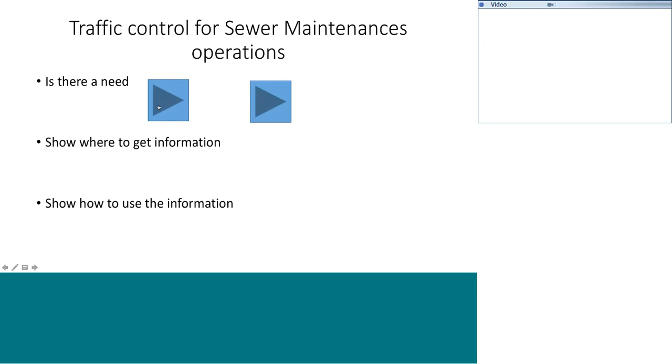Anybody ever heard of the Manual on Uniform Traffic Control Devices? It's huge, isn't it? When you think about that, that manual is the minimum standard. And that's something we have to deal with as we set up work zones and as we work in these roadways. I'll show you the range of that here in just a minute. So that's where you get your information, and then we would show how to put that information into place.

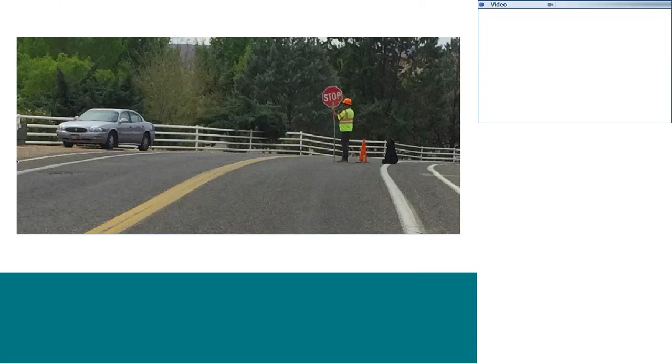Let's get a little closer. Can he have his car that close? Can he have his lunch pail that close? Can he be standing in a traffic lane?

If you look at it, here we are. His vest should be meeting the ANSI 107-2004 or 2010, which is the last edition, vest. That vest was what color? Fluorescent yellow-green, was it not? Anybody know what the state of Utah has identified fluorescent yellow-green for?

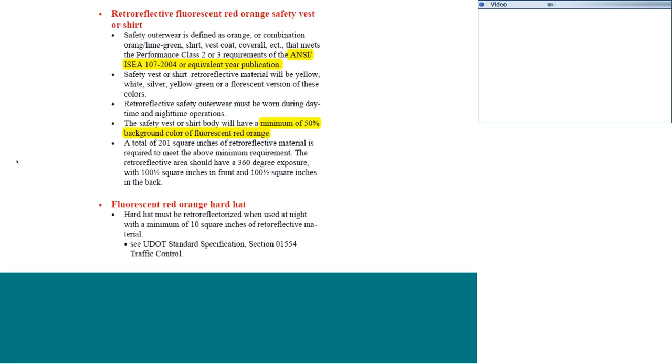What was right behind the flagger? There was a cone there, was there not? 36 inches or so. Did he trip over it? Did he try to get out of there? You bet he could. So those are all things that we could look at,

and we can find areas that we need to upgrade or make better.

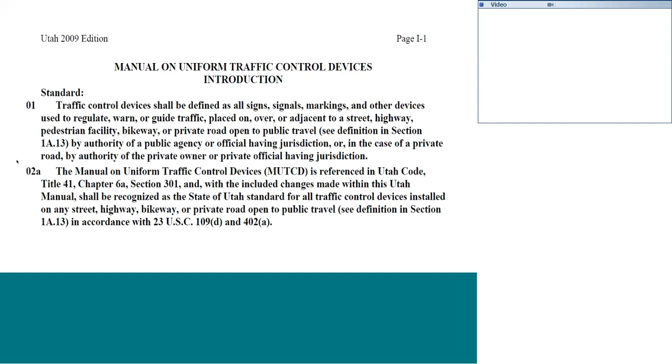Part 2A, or paragraph 2A: the Manual on Uniform Traffic Control Devices, or MUTCD, is referred to in Utah's Code, Title 41, Chapter 6A, Section 301, and with the included changes made within this Utah manual, shall be recognized as the state standard for all traffic control installed on streets, highways, bicycle ways, and private roadways open to the public. Again, it tells us to see that same section.

So here's our section: private roadways open to public travel, private toll roads, and roads, including any adjacent sidewalks that generally run parallel to the road. Why are we talking about sidewalks? Do we have to deal with sidewalks? Do they have a standard? What's the standard for sidewalks?

It's the Americans with Disabilities Act, is it not? So everything we put out there has to have the same ability for those people to move from one area to another, whether they're handicapped or not. So if we put them across the curb and gutter, we need to build a ramp that meets the standard of 8%.

Within shopping centers, airports, sports arenas, and other similar businesses and recreation facilities that are privately owned, but where the public is allowed to travel without access restrictions. Roads within private gated properties, except for gated toll roads, where access is restricted at all times. Parking areas, driving aisles within parking areas, private grade crossings shall not be included in this definition.

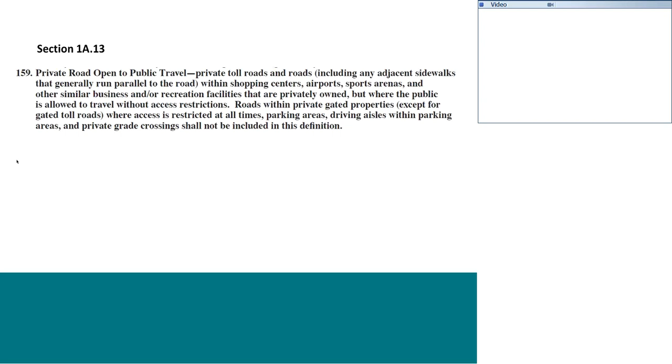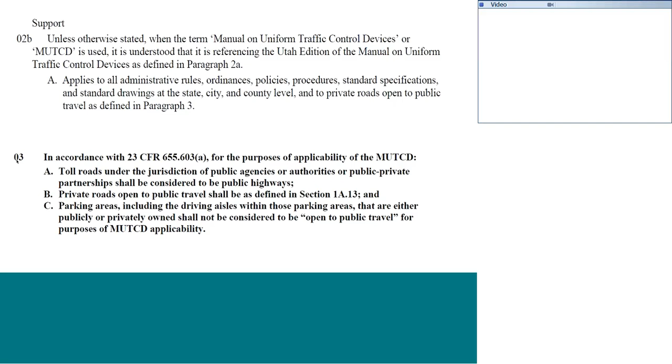Okay. One thing that kind of bothers me because I've gotten older - does everybody know about how when you get older? Some of you guys a little older might recognize that you have a change in your eyesight, do you not?

Every 13 years after you're 21, you need double the light to see the same thing you saw at 21. So when you get to be a young guy like I am, you can realize how many times that's doubled. And this bright light makes it so I don't see a lot of things defined. I get really ticked off at the highway patrolmen because the first thing they do when they stop somebody in the middle of the night is turn their overheads on, and they turn them on high intensity.

What does it say in the MUTCD about lights on arrow boards and work areas? If they have a dimming effect, it should be dimmed to half of what their normal daylight brilliance would be. If they're not, they should be directed away from the flow of traffic at a perpendicular angle, or they should be running parallel to traffic as they are moving away, so it doesn't shine towards the traffic. So those are the things we need to look at if we're working at night.

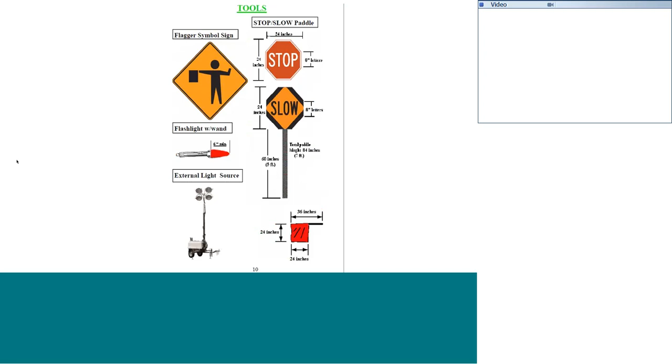And again, Utah's stop slow paddle is of a different standard than the MUTCD. The MUTCD standard is an 18 by 18, and Utah's is a 24 by 24. Okay, other equipment, pencil and pad, driver's information, that kind of stuff.

Talks about the flagger station. We've already talked about that. Talks about the procedure the flagger should go through. It's laid out how that flagger should be doing their job. The stop, hold the paddle in the right hand, put their hand up, and they face traffic.

After the first car stops, they move out to the center line so that the people behind that first car can see them. When they get the message from the other end, check the work zone, move back, turn the paddle to slow and release traffic, slow traffic with the slow sign. So the procedure is all laid out for them.

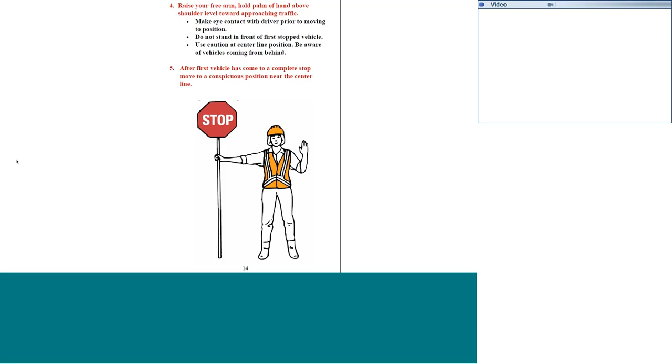Also laid out for the flag. Virtually the same setup. This is something that UDOT's put out there that I really like because it gives you the different types of surface conditions you may have on roadways and the distances for the speeds you may have to adjust for.

And if we start looking at those conditions and a lot of the areas that we flag, that visibility issue becomes a real problem for us with trees, hills, curves, or whatever it may be. So this is a real good one here.

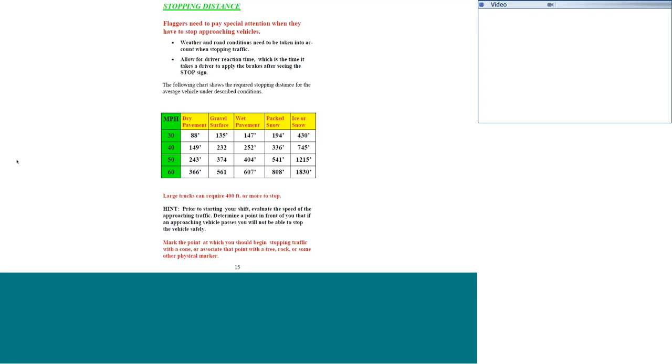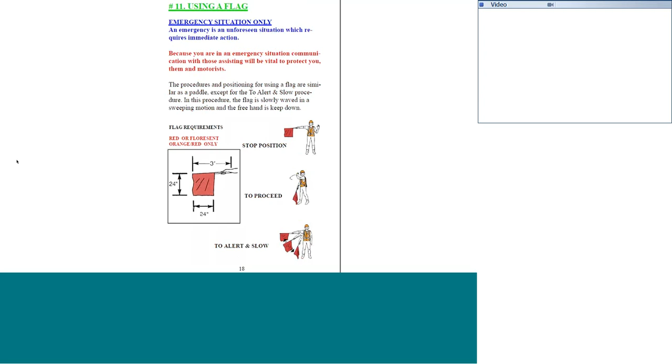This is the release signal, and this is the slow down signal that we've already gone through. Emergency flag: there's the stop position, the release or proceed position, and the alert position by moving the flag up and down. It's not waving the hand. Hand goes to the side, flag goes up and down.

What do we do with pedestrians? People with disabilities and bicyclists. We already talked about the Americans with Disabilities Act and how you have to comply with that.

Emergency vehicles, you should have a procedure for handling those or special circumstances. You have a hay swather come through there and you've got a limited width, and that hay swather is wider than it is. What are you going to do? What's that flagger supposed to tell them? So that all needs to be laid out.

What kind of authority does a flagger have? Has the same authority as a police officer to control traffic. What's the difference between control and direct?

Control is stop, release, and slow. Direct is telling them where to go. Only a law enforcement officer can direct traffic. So a flagger is just controlling traffic, okay? And they have to be in a work zone, and it has to be properly set up for that flagger to have that authority.

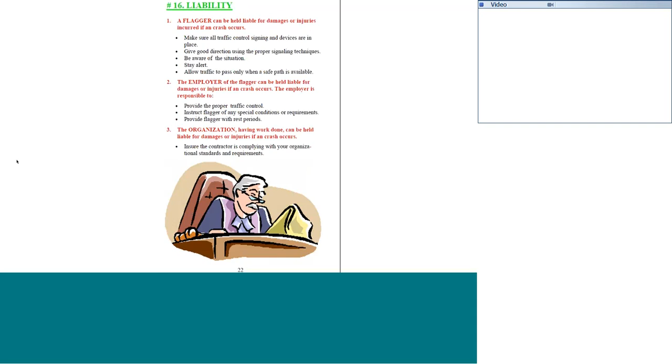Okay, we have a liability with this stuff? You bet we do. We've got a real liability with it. Those are the things we're trying to keep away from with it.

They have a lot of appendix. These appendix talk a lot about the same things. This is in the uniform handbook, this is a page from the Manual on Uniform Traffic Control Devices that they've put right in that handbook. There's another page from it.

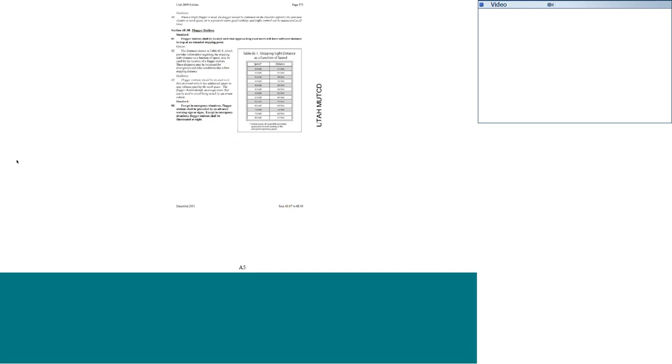Here it goes through and shows you those procedures again for the flagger, with a paddle and with a flag. Talks about the distances here, and it talks about the minimum standards set by the Federal Highway Administration, which is the MUTCD and the Utah adopted one.

And it talks about the traffic control zone and the four parts of that traffic control zone. You have a warning area, a transition area, an activity area which includes the buffer space, the work area, and the actual traffic path.

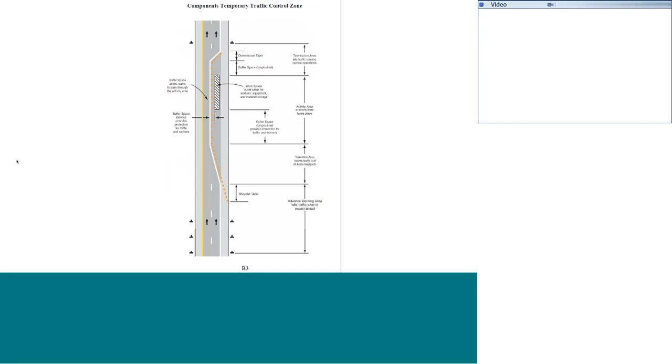And then you have the termination area where you return traffic back to its normal lane that it would be going into. They even go so far as to give you pictures to show you what it should be set up like. And this is one of those pictures here.

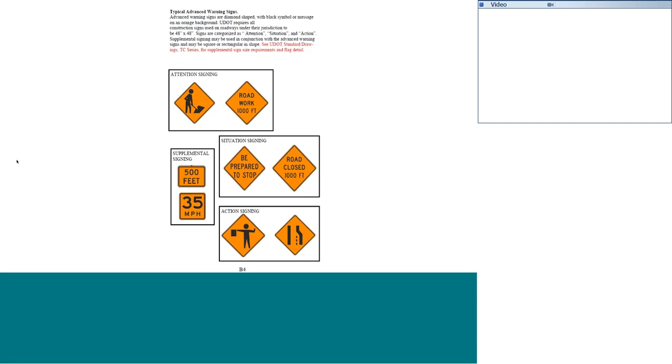This is talking about the signs. What does orange mean? I mean, we've got red out there for stop signs, and we've got yellow out there for caution signs, but what is orange? Orange is a temporary caution sign. It's out there for temporary stuff. If it is permanent, it is yellow. And it may have the same symbol on it, but it's going to be yellow because it is permanent.

There's our heights and our setbacks for them, both for portable and for stationary. Talks here about what we can use and what we can't use with different speeds. They always told me for UDOT you could not use cones. Here it tells you where you can use cones and where you can't use cones.

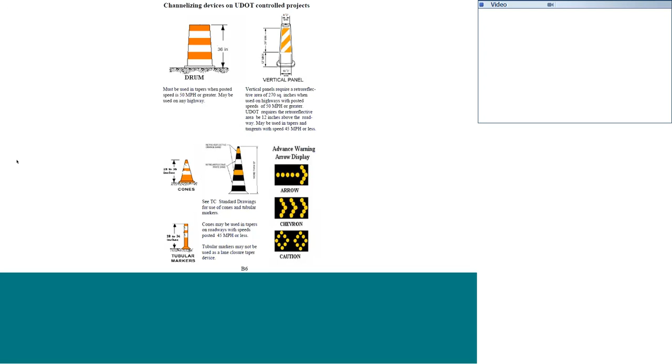Talks about your arrow boards. It tells you what is acceptable there and what isn't acceptable there.

This is a really good chart, and it's the same chart that you have here in these drawings, the TC4A page. And this one goes a little bit further and tells you the flagger's distance and the flagger station. But this is a lot better chart, in my opinion, than what the federal people have put out, because the federal people have put it out there as urban low speed, urban high speed, and rural, and interstate and freeway expressways.

What's the difference between urban and rural? Curb and gutter and sidewalk. What's the difference between urban low speed and urban high speed?

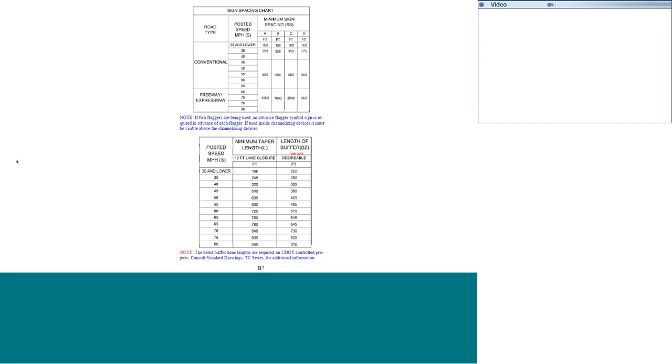Utah defines it as 30 miles an hour. Below is low, above is high. Utah's done a lot better job with it as far as I'm concerned, because they've laid it right out. They've told you what it is and what it isn't.

What do we do on intersections? It's telling you right here, you've got to have a flagger for every leg of the intersection. If it's a signalized intersection, it has to be in a red flash mode. If it's not in a red flash mode, you've got to have a law enforcement officer to direct it.

How many lanes of traffic can a flagger take care of? Two through lanes and one turn lane if present. So you can see the one to the left side there has got 4 lanes in it. That's why it's got 2 flaggers.

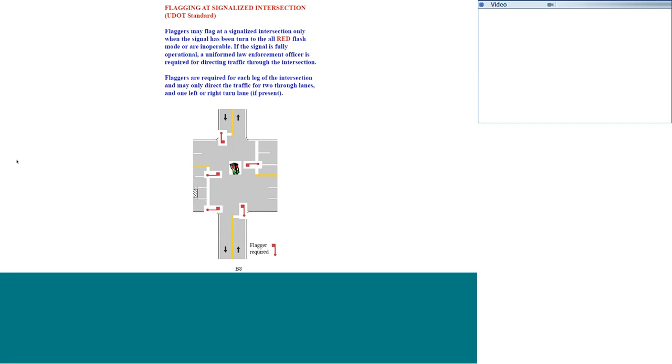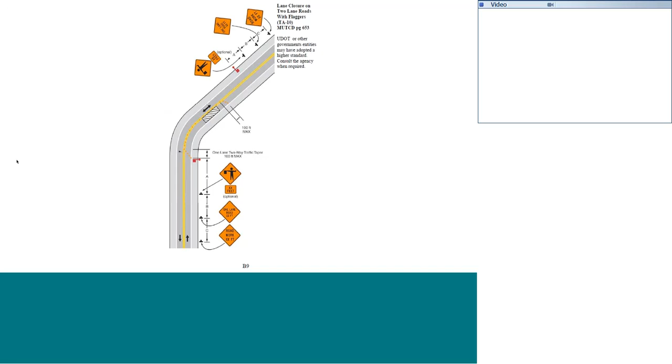So that's where it lays it out, tells us what it can be and what it can't be. This is typical application 10, and they use it a lot in our training because of the sight distance. And where we're on a curve like this, they want to have it so that people can see the flagger. So you move the flagger out to where they may not be able to see the work area, but at least the people coming up to that work area can see him or see them.

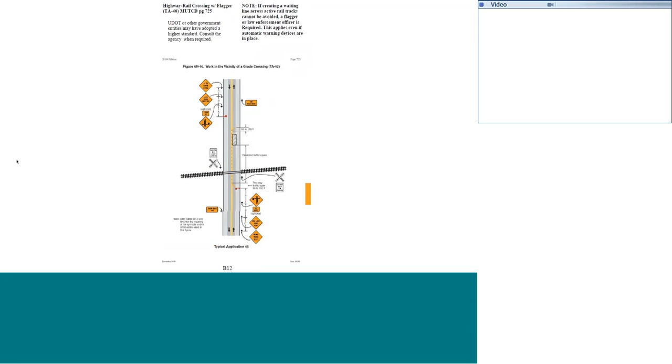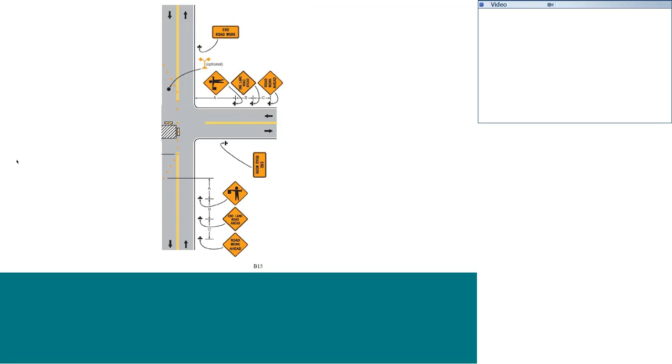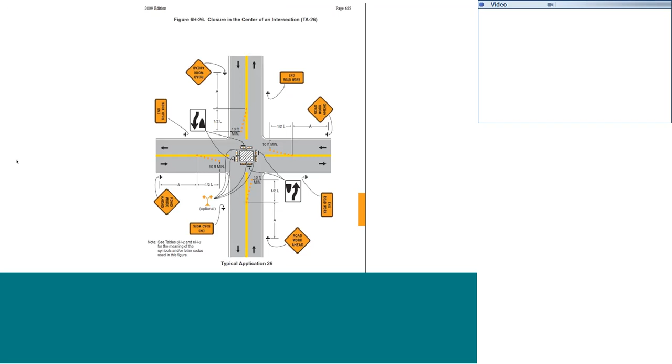Go through these. These are just some additional ones I put in here because I think there are some ways around some of the things that you may have to deal with. Here's one in the center of the intersection. There's the manual, and that's where you can find your information for it.

I think the fastest way to find the information is to go to UtahLTAP.org and click on the training resources, and it brings you to this page right here, and that is your manuals and stuff right there. So if you can get onto UDOT's website and get there in one click, I would like to watch you do it because I've tried, and it just doesn't happen.